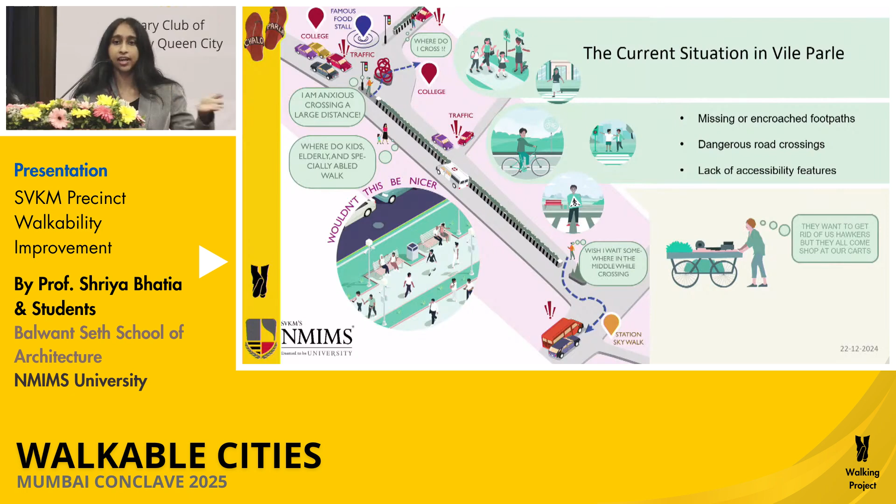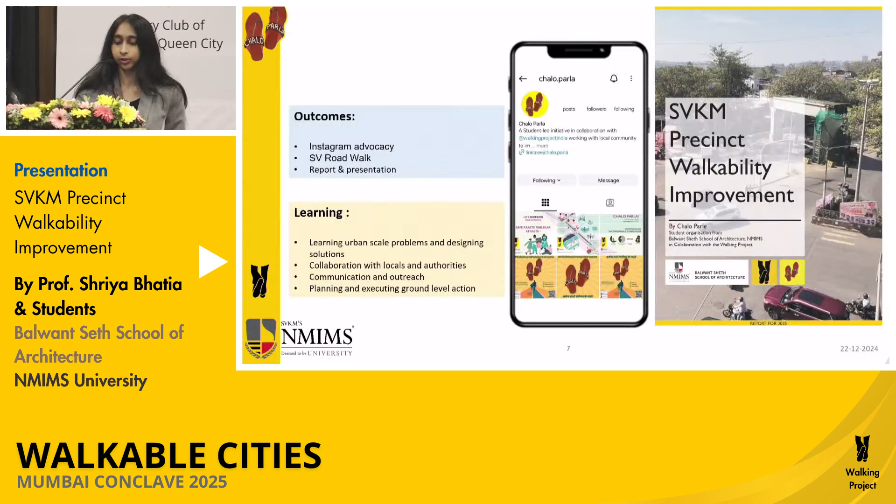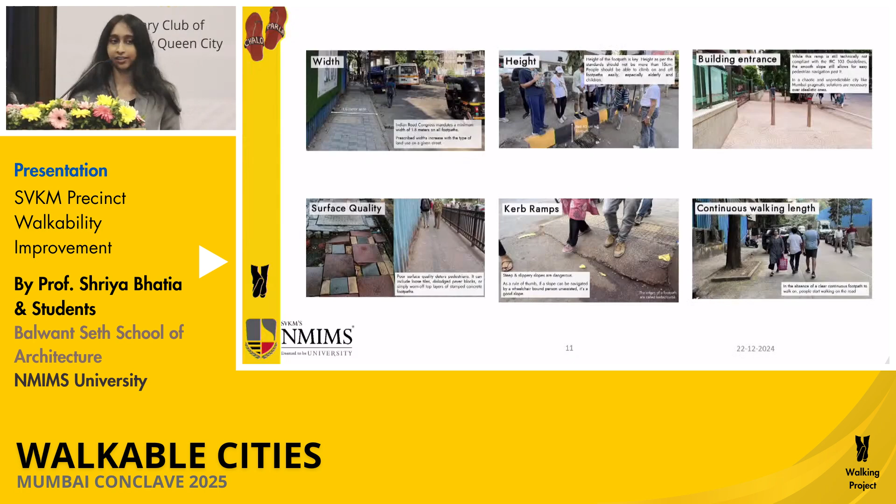This was a few images from the SV Road walk. So we had great stakeholder interaction, people who lived there giving their feedback. And we took this further by going to every stakeholder there is. So the hawkers who are there legally, the temporal people walking across, and more. And the parameters are pretty clear. I think Pankaj sir and Pranav sir have already explained, like surface quality, continuous footpaths, obstructions, adequate crossings.

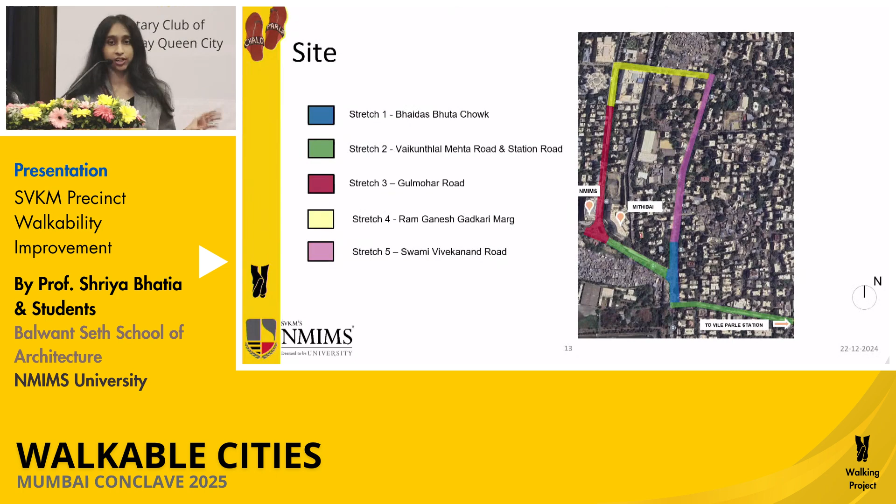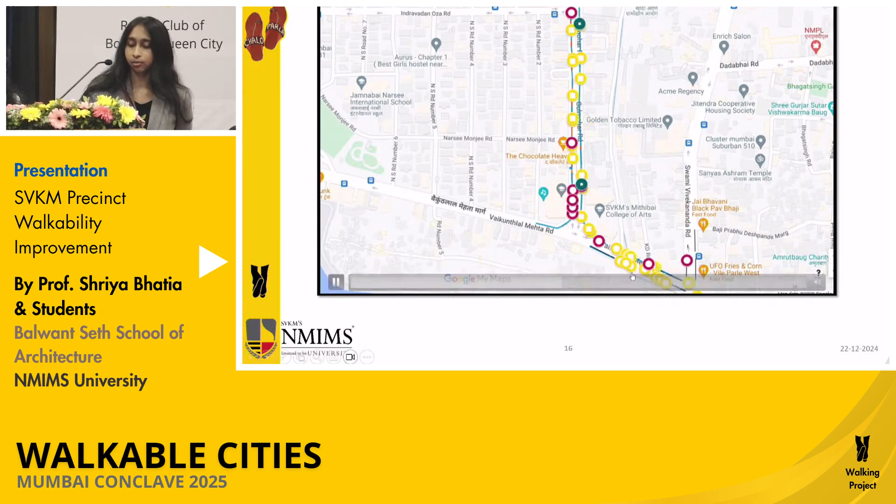And now here I'm coming to the stretch we've intervened in, and I'll take you in detail through one of the stretches as well. But this is the precinct along our college. So we started by conducting a My Maps survey. So actually on site, just marking out everything from the trees to the obstructions to the hawkers, and then really translating that into drawings. So marking it through images and of course the drawings.

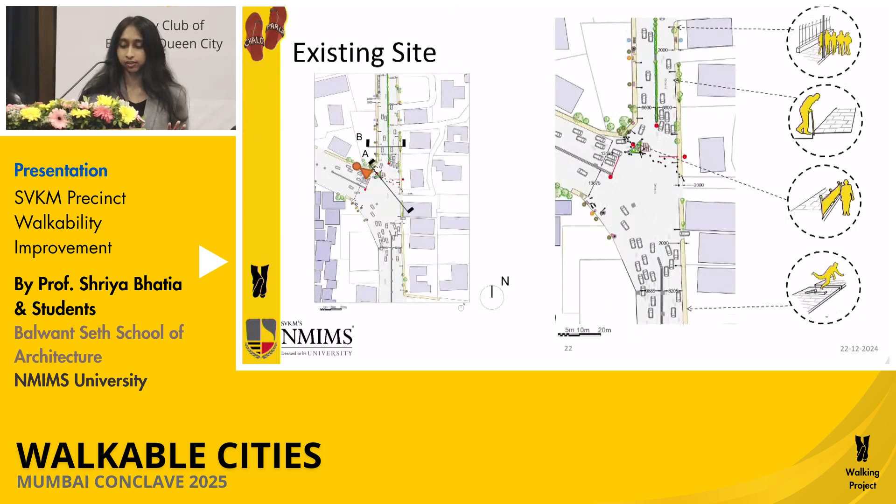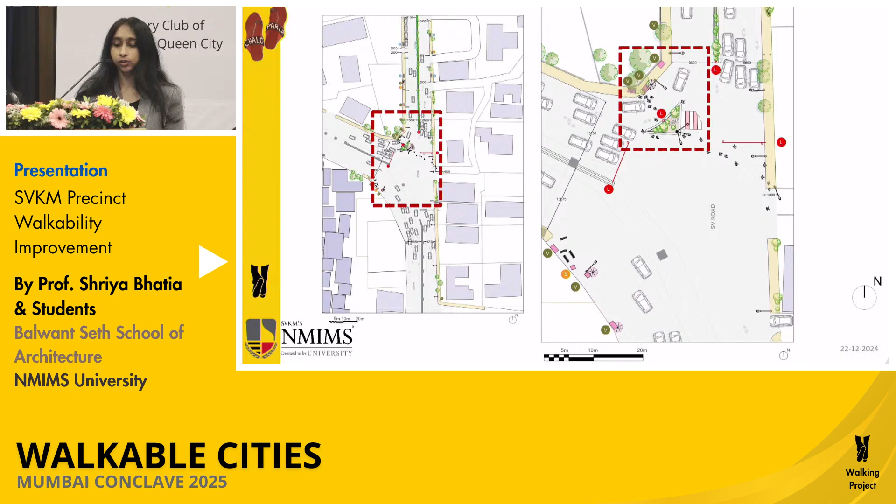So I'll explain this Bhaidas Bhuta junction in detail because let's just take a very simple example, which is this traffic island that was there. It was operating perfectly normally until it got built up with railings and planters were added. And now, if you can see in the graphic, instead of actually accessing the traffic island, you have to walk around it, further aggravating the bottlenecks, the traffic, because it's so unsafe for, A, the pedestrian, B, even a vehicle has to wait.

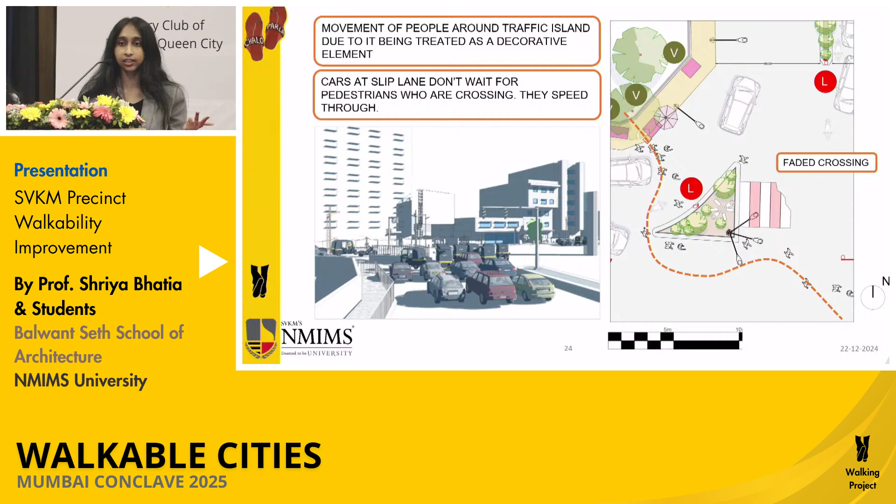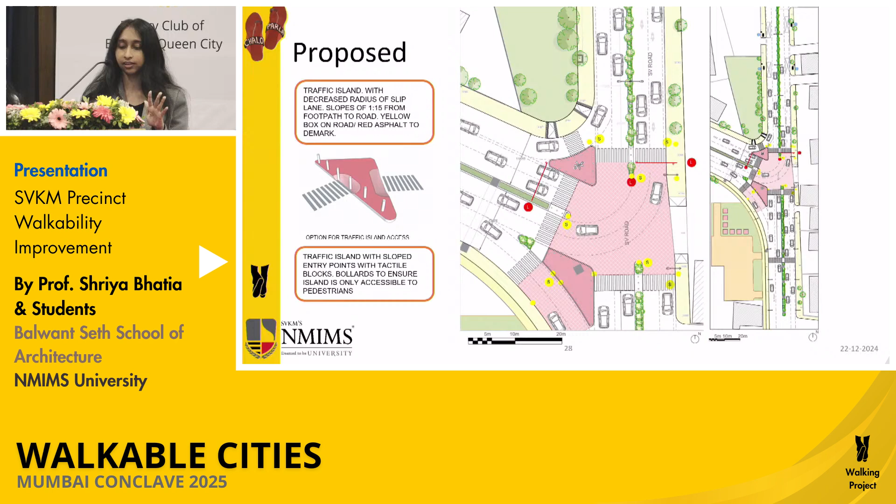And it's just entirely an inefficient system that's there. So just simply following Indian Road Congress guidelines, we have suggested 3 solutions. Designing the traffic islands beautifully, having great disability access, so having your 2-meter ramps with a decent slope that makes it easily accessible is one option. So you can see this option has the ramps.

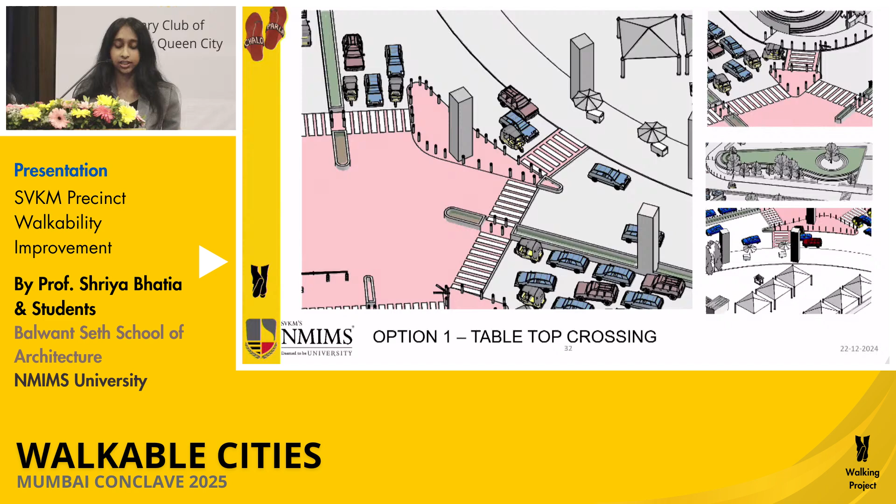The first option is the ideal condition where you raise that entire region as a tabletop crossing. So, let's say, a wheelchair doesn't have to go down to road level. Everything is on the footpath level, and the vehicles are the ones who have to actually come up to the tabletop level. Second is obviously the ramps. And third is having everything at grade level is also a solution.

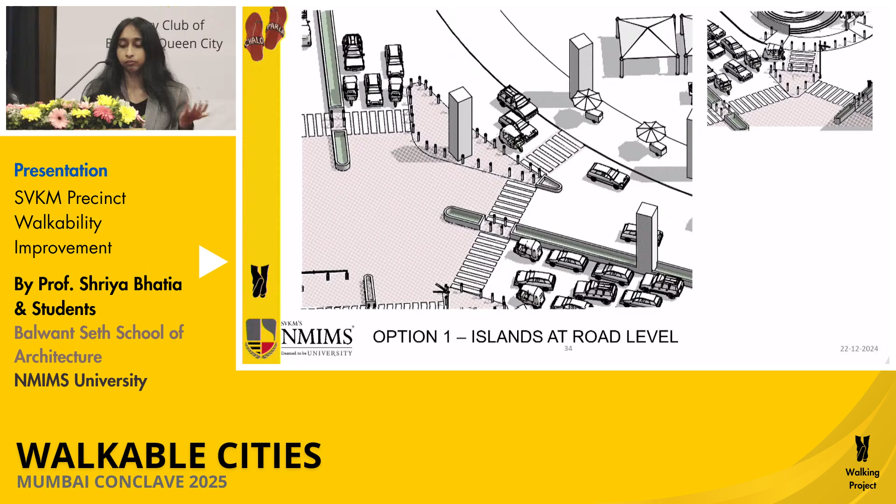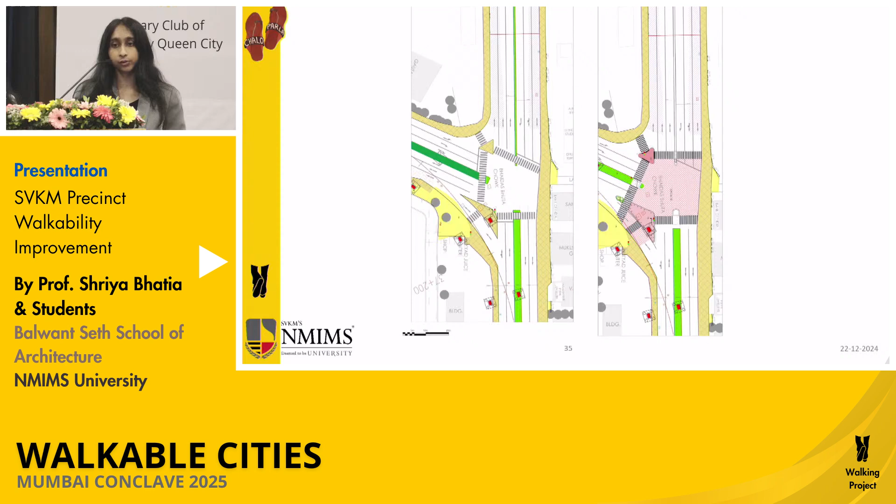So if you have these traffic islands, they become these accessible points for a pedestrian to wait while crossing, right? So they don't need to be raised or somehow more difficult for a disabled person to access, is the ideal thing we're explaining. So this is an MMRDA drawing which we overlaid our suggestions on, and we were very happy to receive positive feedback regarding that. And we've done this for every single stretch, just suggesting simple solutions, implementing them, and seeing whether they work or not.

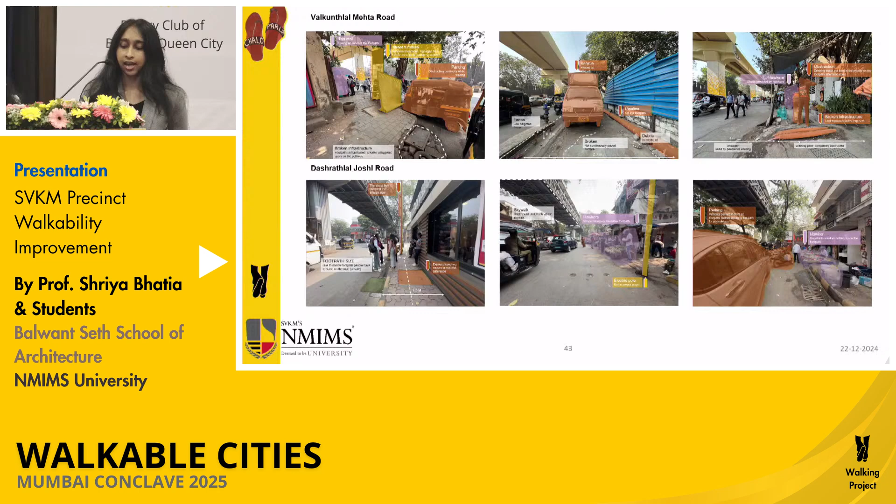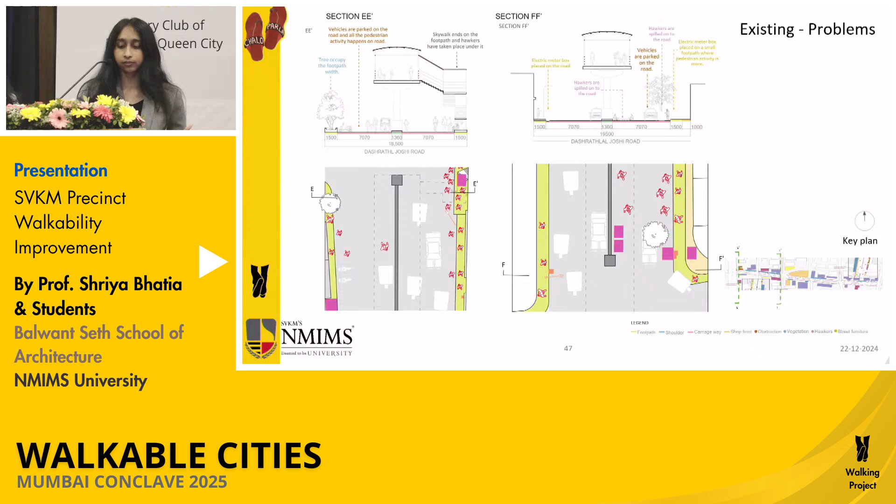So this was the second stretch where the issue was that the shoulder region of the road was just used for auto parking. So why not just incorporate that in the footpath and have hawking zones instead, or auto stands, or specify designated parking zones so that it doesn't become a problem on the road. And just going to our third stretch, which has the metro.

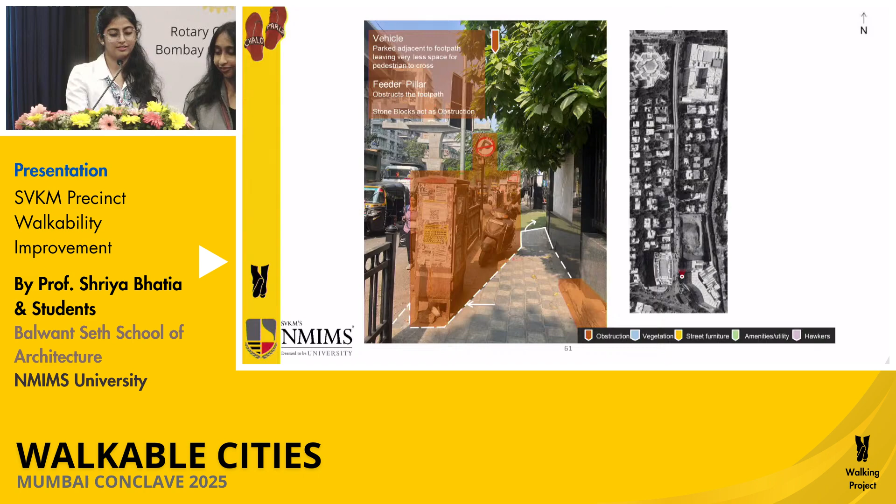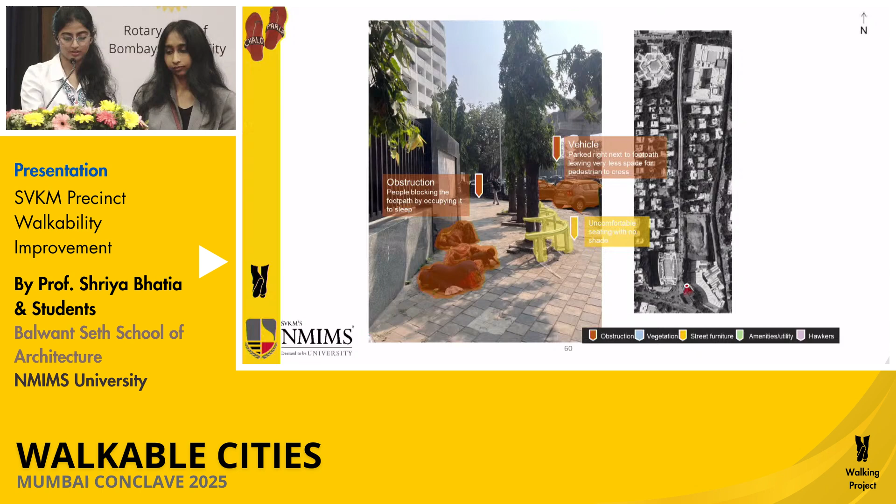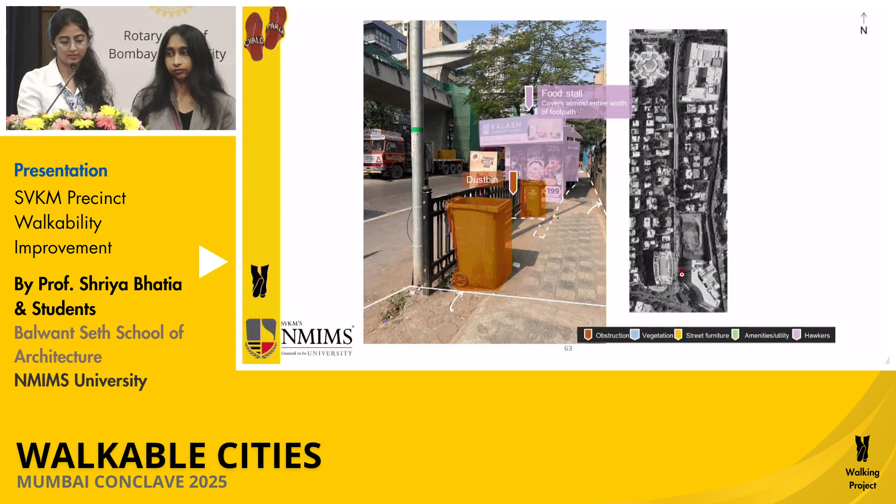Okay, so the third stretch is where the Mithibai gate and the NMIMS building gate are. Let's get to the images first. So this is the junction we're actually talking about. Again, there's a beautification of the traffic triangle that's there, so people are not able to access it. This junction has a lot of pedestrian crossing because a lot of students access this place. As Shriya ma'am rightly mentioned, there are more than 50,000 students and 19 colleges running in one single building. So the footfall here is huge.

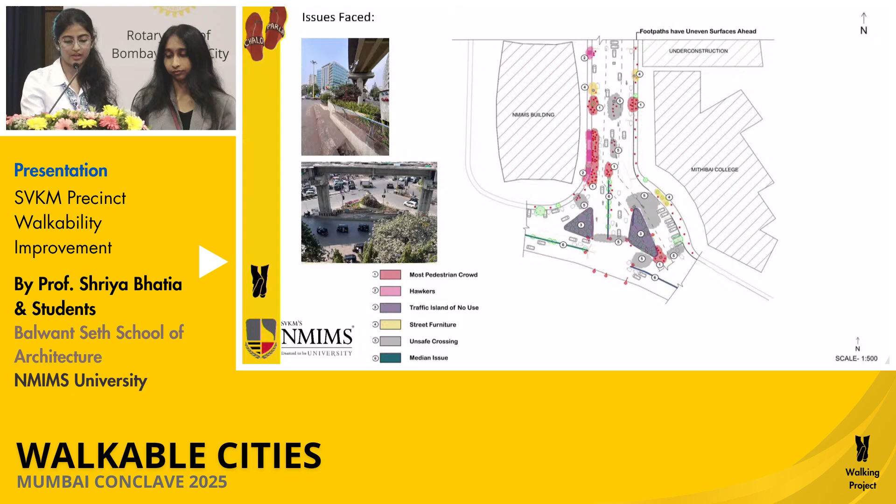Now, one surprising, I mean, it's not surprising, but in this stakeholder interaction that we had, the stakeholders rated the street to be a 2-star out of 5-star street based on their walking experience. So we identified the problems here, which was the crowding happening at the gates, there's no proper crossing, the traffic islands not being utilized. And these are the existing sections for the same.

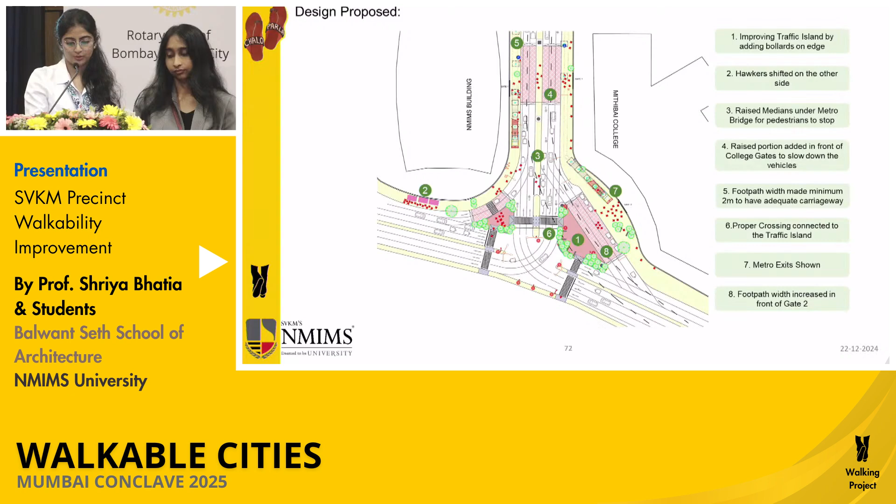We then proposed a few solutions. The first one, in the graphics right beside, you can see, is making the traffic islands accessible for both the average human as well as the disabled. Then providing proper designated zebra crossings, with medians that are wide enough for crossing. We also have the metro station exits which are opening right beside the gate, and hence we've considered giving a wider footpath there. The slip lanes can have a tabletop crossing so that the average speed of the vehicles can reduce. A similar intervention is proposed for the other 2 gates, wherein a tabletop crossing is introduced.

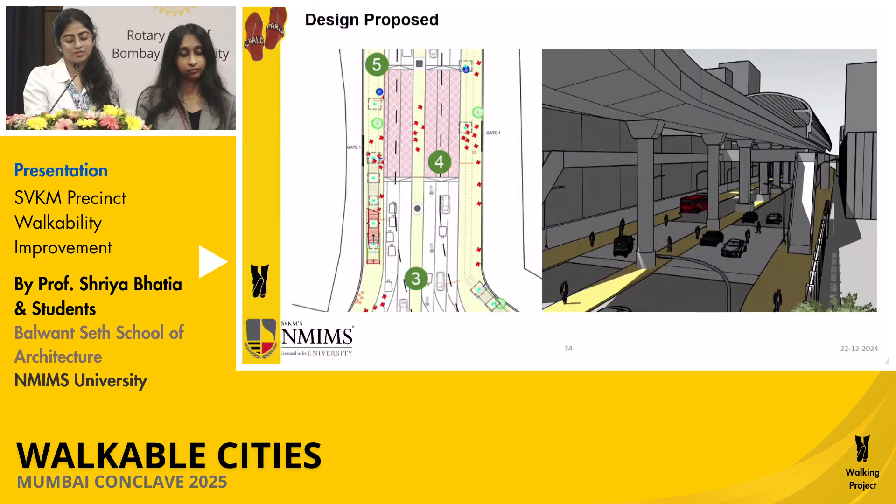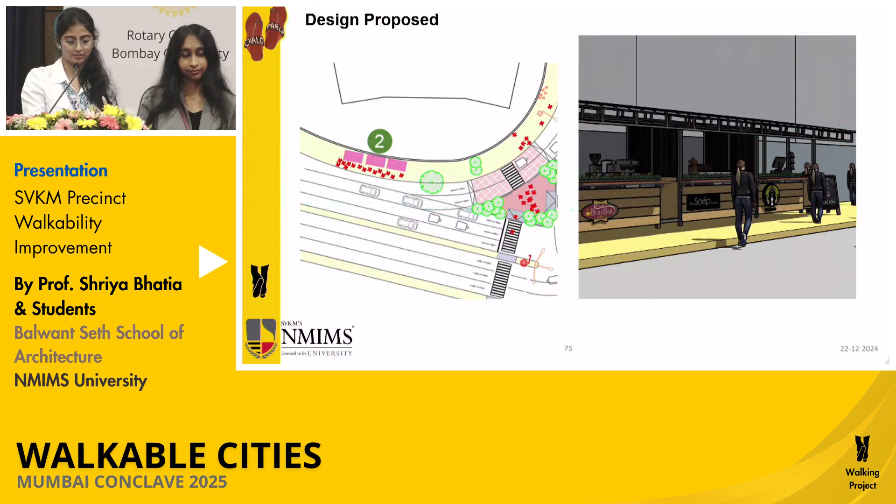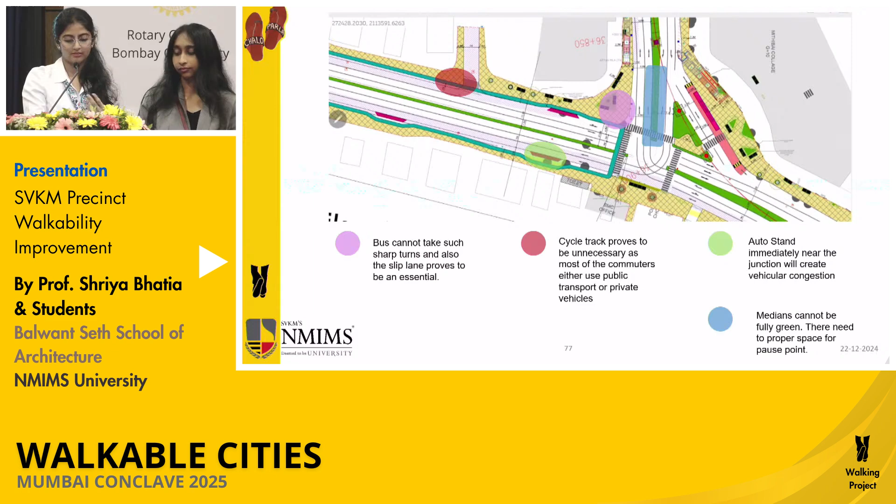Now, the most important, major and controversial topic here is the hawkers, the food stalls that are there. So we have considered moving the food stalls to the other street so that the food stalls or the people do not obstruct the main interactive junction. Again, this was a small interaction with the MMRDA that we had, and we helped them with a little bit of changes on the junction designing. These are the graphics.

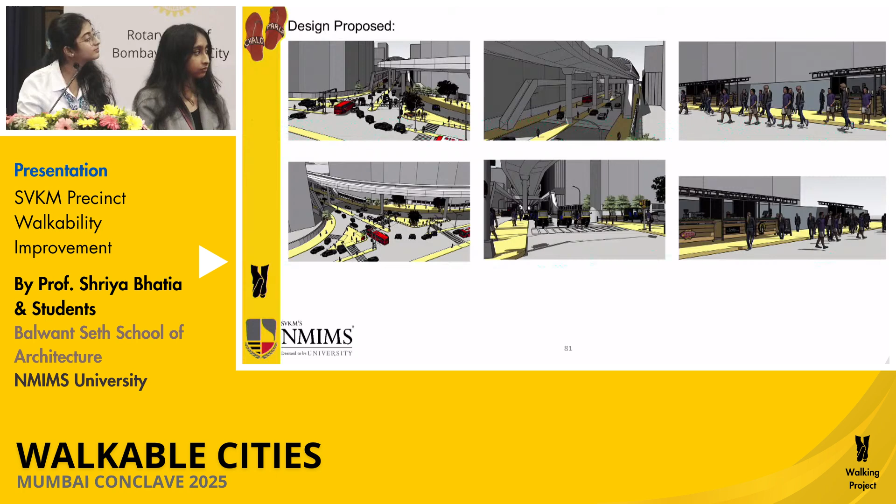I also want to acknowledge at the same time Mr. Ritesh Patil is there from MMRDA. Because of our time constraints, we couldn't accommodate you, sorry. But if you want to quickly add 2 words, you can. You want to say something by any chance? That's okay. Then fine, fine. Let it be because we are anyways really rushing. We have had to sacrifice Aishwarya's presentation also on SV Road. So yeah, if you can wind up quickly.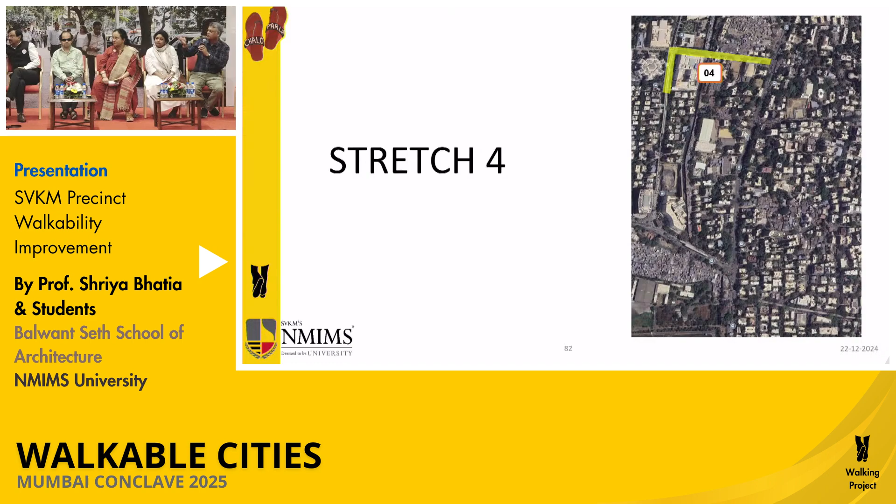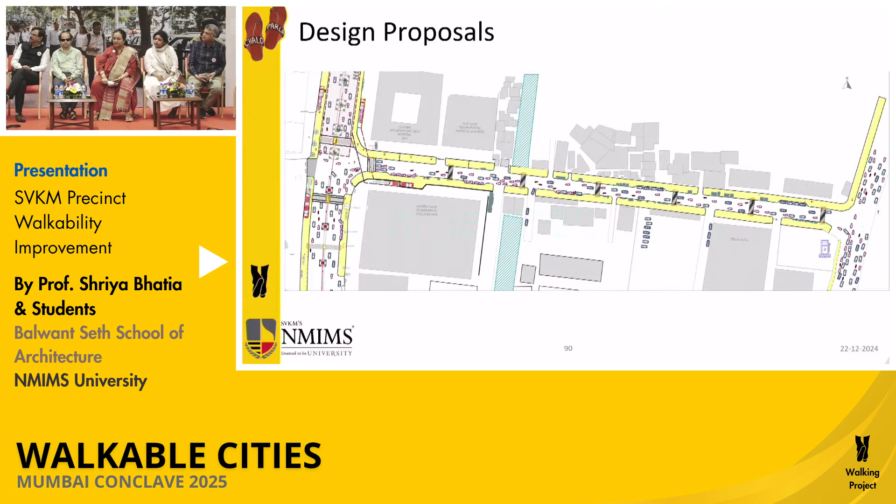Yeah, sure. There's another junction that we studied, and this is Irla Market Road. The one single main proposal that we had was to make this road one way, and the rest of the things are a tabletop crossing, pedestrian safety, and dividing the footpath into zones, basically two zones, the utility zone and the pedestrian walkway zone. Yeah, that's how we wind up.